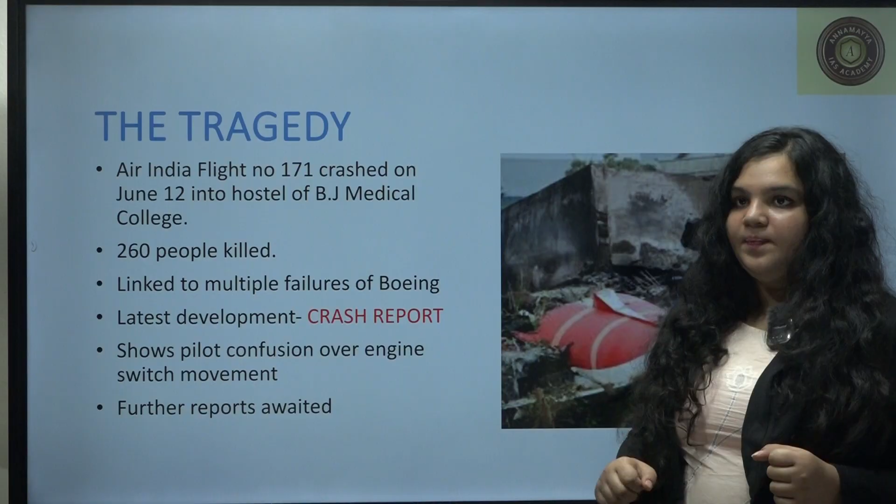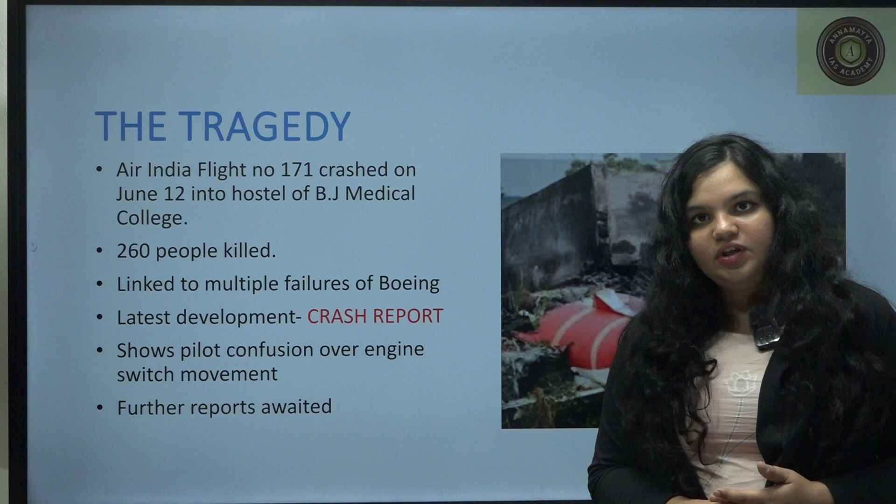Again, I need to emphasize that I am not making any definitive statements in this entire presentation because we are awaiting further reports. So this is a broad analysis, please watch till the end.

So I am briefly telling you what happened to the flight. According to the reports in the news, the aircraft lifted off at 1:38 p.m. and within 3 seconds the fuel switch got cut off. Here is where the entire controversy is going on in the crash report. Next, there is a certain conversation recovered between the pilot and co-pilot, but whatever happened, they could not revive the engines, they could not restart the engines, and the plane crashed.

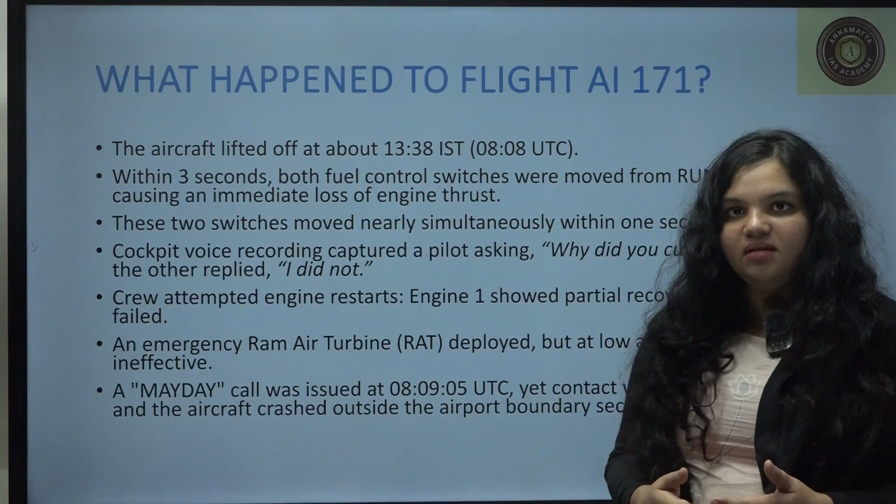Now, key findings. Please understand that UPSC is not going to ask what exactly happened here in this fuel cutoff and everything. But while you are reading topics like this, it's important to analyze all these aspects so that you can understand what happened and give better suggestions, have a better understanding of the topic.

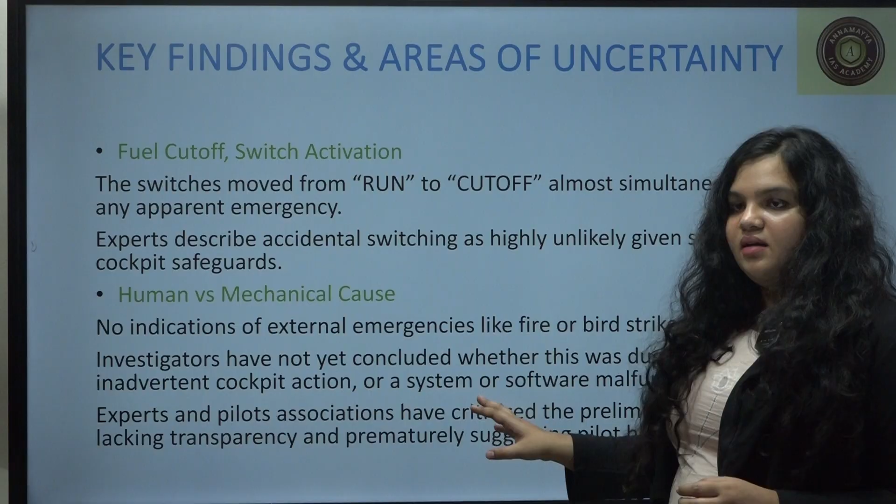Briefly, the entire controversy is related to the fuel cutoff and switch activation. They are saying that from run to cutoff the switches moved almost simultaneously. We don't know what happened as of now, and experts are citing mechanical issues, not human issues. There are no indications of external damages like fire or a bird strike or anything.

Next, this is a known advisory on fuel switch design. Please focus. In 2018, AAIB referenced an FAA advisory about fuel switch. This happened in 2018, and Air India reportedly did not implement an inspection following that advisory. This shows the overall inspection ecosystem in India as a whole, not just in the aircraft industry. I am not saying again that this is the reason that led to the crash, but even small advisories like this should not be ignored.

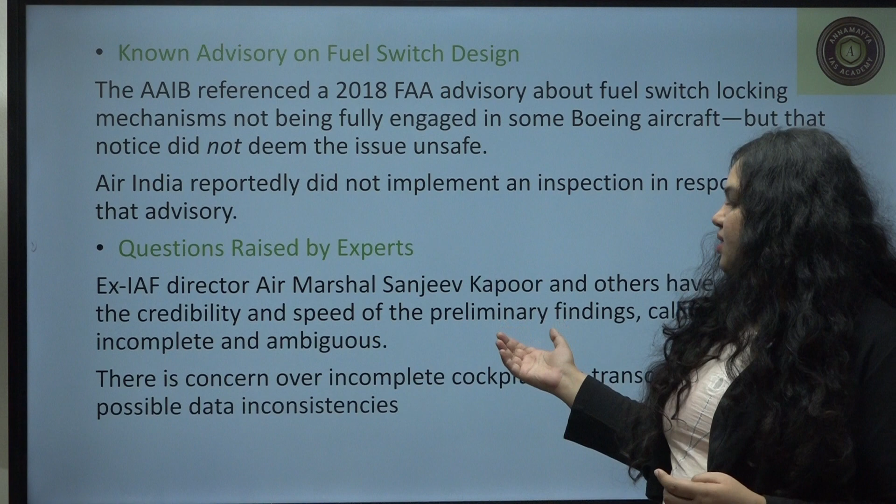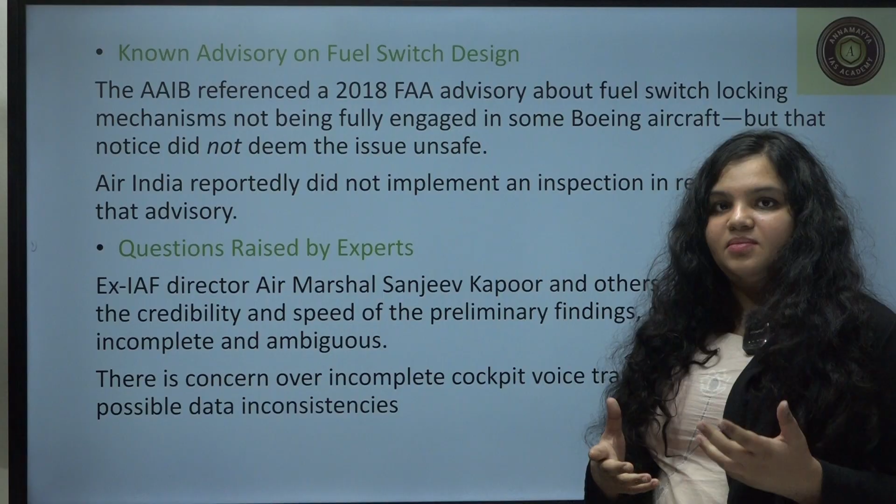Experts like Air Marshal Sanjeev Kapoor are also raising questions on the credibility of these reports, and we don't want to get into further controversies, so let's end it here. In the end, no matter what experts say, the Airline Pilots Association and the families of the victims deserve answers, and they deserve answers fast.

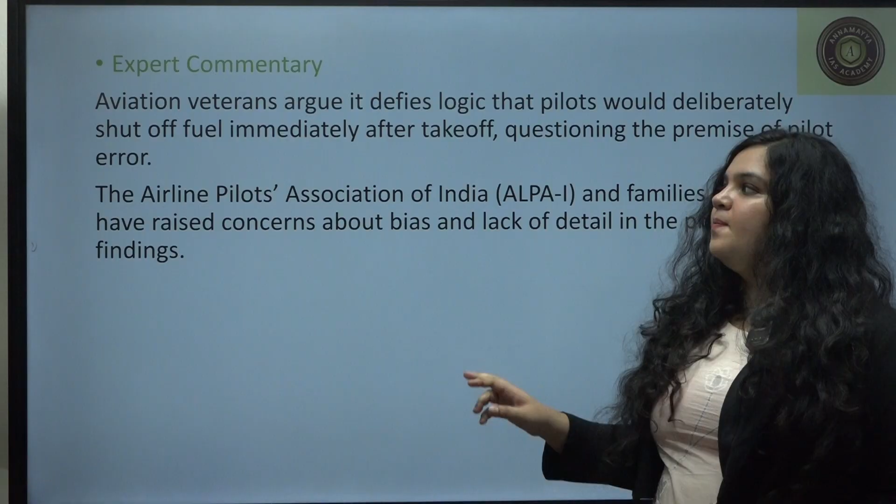Now, way forward. From here on is where you can include the points I give you in all four GS papers. Here is the UPSC angle of this particular news. I have covered all stakeholders, where they are going wrong and what can be done to avoid such tragedies in future.

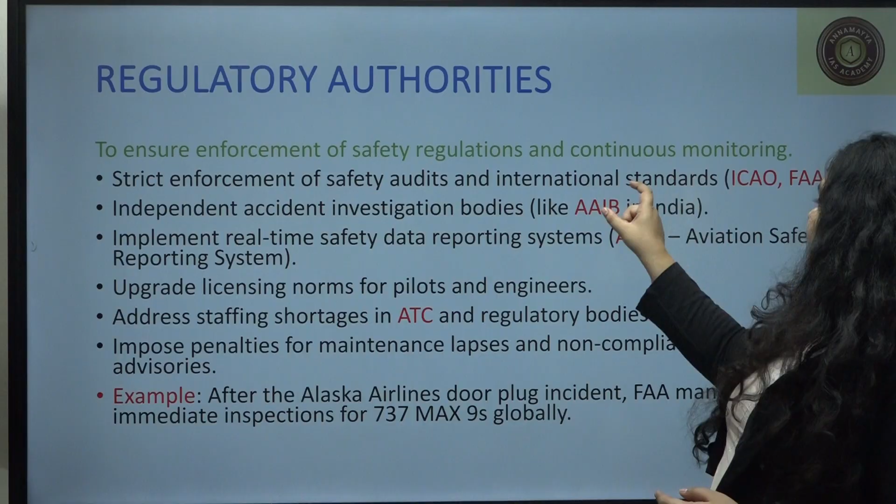To begin with, the regulatory authorities. They enforce safety and regulation standards. Please emphasize the words I have highlighted in red. So these are the regulatory authorities. Take a look at their full forms and when they were formed. They can potentially be asked in prelims, like a match the following or something.

Regulatory authorities are one area where we can bring the highest and most impactful change. We need enforcement and strict safety audits, then we need to impose penalties for maintenance failures. We know the story of regulatory authorities in India—bureaucracy, red tapeism, everything comes here. A successful example, if you want me to quote, is after the Alaska Airlines door plug incident, where the FAA mandated inspections globally. This has significantly reduced such kind of mechanical errors in aircraft.

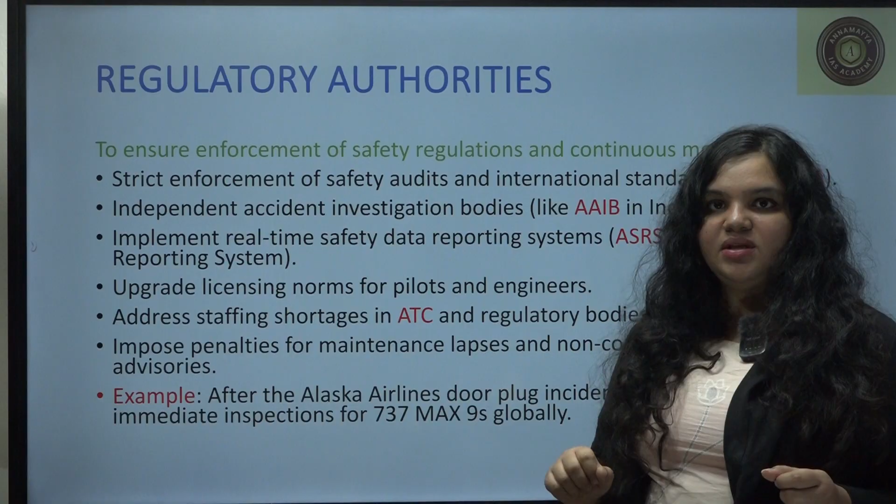Now airlines and operators. In airlines especially, operators are different and aircraft manufacturers are different, just so you can get a background. So in maintenance, training and SOP support is where airlines and operators come into the picture.

Now here we need proactive maintenance, not just routine inspections. Routine inspections follow a protocol saying when you need to inspect an aircraft, but we need proactive maintenance. We should be able to predict what can happen, continuously monitor and predict potential areas where things can go wrong, so that these fatalities can be avoided.

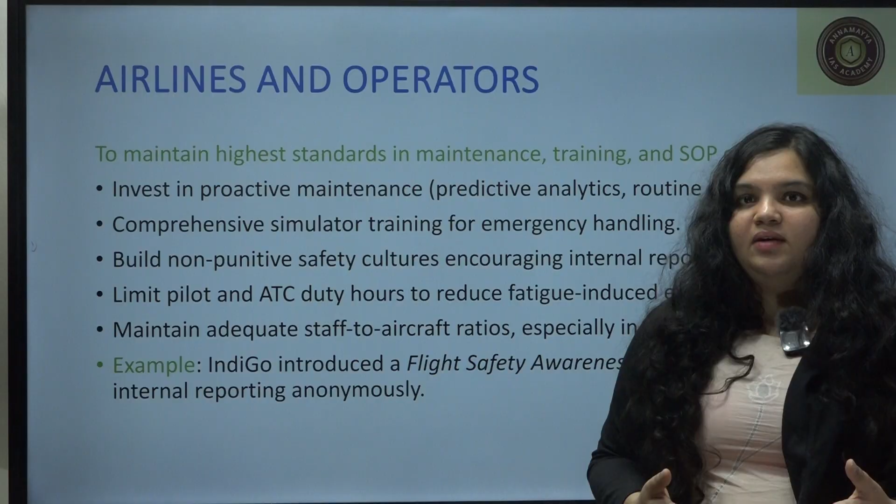And here again we need to actively employ data analysis and artificial intelligence. A successful example is Indigo's flight safety awareness app. This allows them to anonymously report irregularities, even if the pilot and co-pilot are not well, or under psychedelics, or if there are complaints against the crew. This is proven to aid in the maintenance of aircraft.

Now the manufacturers. This is where all the fingers are pointing. This covers aircraft design, manufacturing and post-sale support. For third world countries, post-sale support is very little, because it is expensive - the maintenance, staff and everything. Reportedly, this is ignored in third world countries.

Now here what we need to do is strengthen quality control during production and use digital twin technology. Apart from this, I've given another example of the multiple MAX 8 crashes of Boeing. This Air India 171 aeroplane is also a Boeing aeroplane.

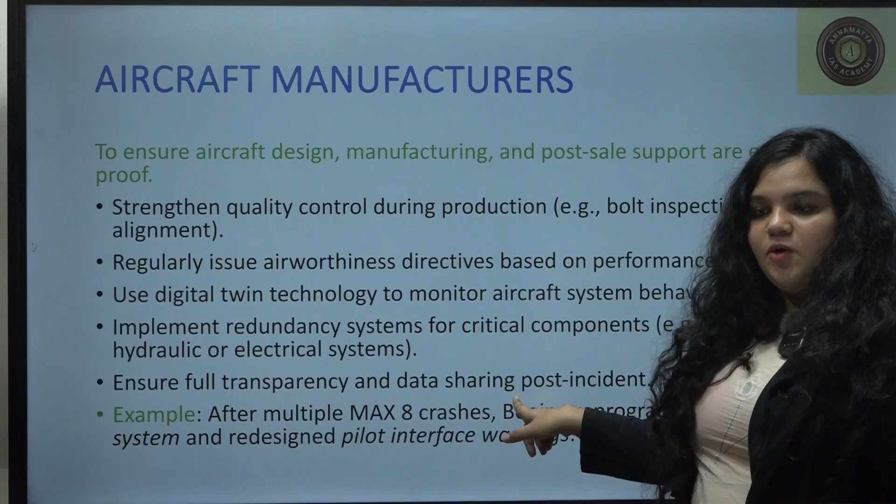Now here I request the viewers to go through one video where the Boeing manufacturer was called to the US Senate and was excellently questioned. I am not giving any conclusions here, the reports are further awaited. Since the past 5 years there are reports of multiple aircraft failures and reports of software updates and all.

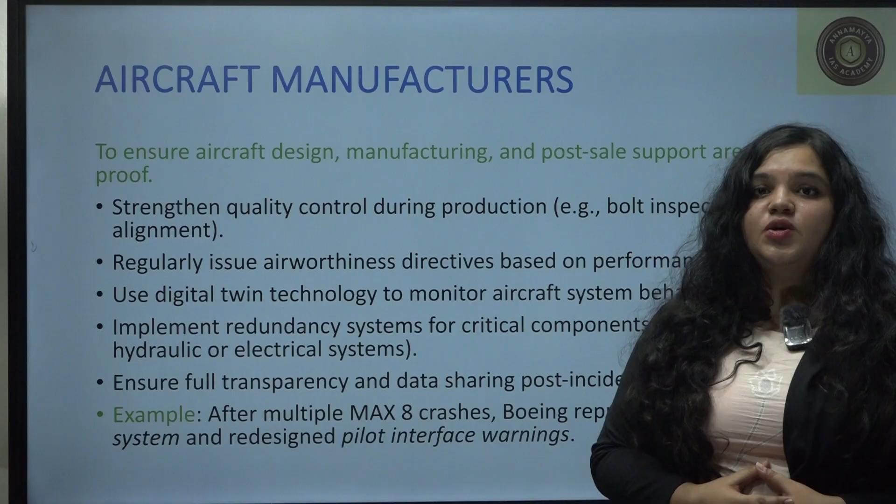This is how a legislator should be. I love that video. This is how the legislature should question the manufacturers and the capitalists who play with the security of citizens, normal citizens. Please take a look at that video. Normal people like us can't do all that.

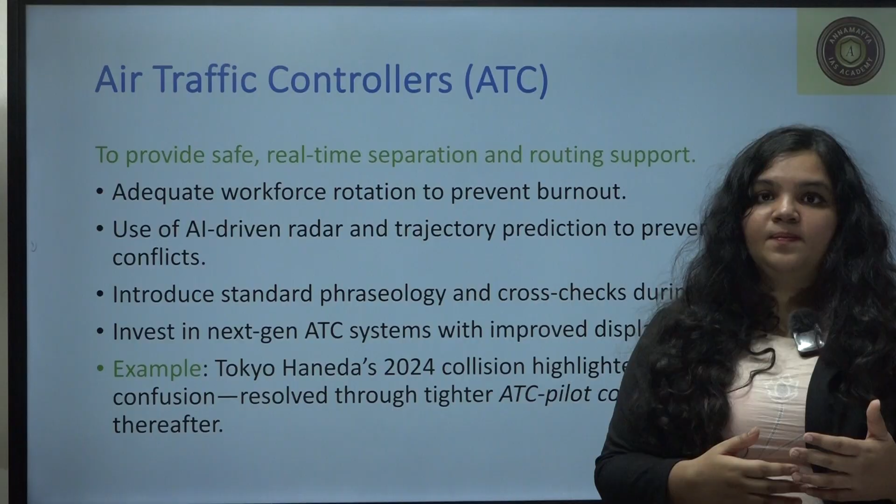So this is our take on aircraft safety broadly. You can use these topics across all 4 GS papers, and I sincerely hope the victims get an answer soon. Thank you.